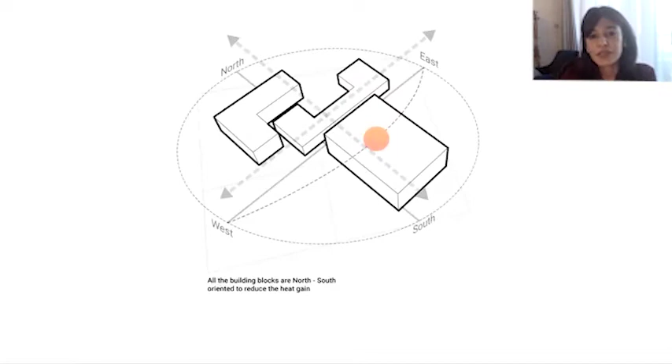So the way we approached this particular project was when we looked at all of the production facilities in the neighboring area, they're basically just sheds with poor insulation, poor daylight penetration, and we wanted this structure to be a revolutionary experience in terms of how a production facility could be designed, in terms of orientation of the blocks, housing manufacturing, offices, and packaging, creating mutually shaded blocks, spill out spaces for outdoor experiences, and creating ample greenery to reduce the heat island effect.

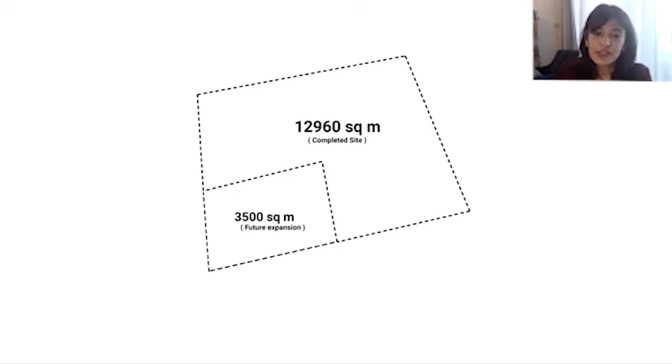So the orientation of the blocks has been done in close conjunction with the cardinals. So we're talking about maximizing the openings and optimizing the window to wall ratio along the north and the south faces for all of the offices and production areas and storage areas which require ample natural light, and along the east and west faces, minimizing the openings, but also providing deeply shaded corridors or shaded windows and openings wherever needed, providing perforated screens using bricks that were available and manufactured locally, therefore reducing the embodied energy of the materials that are being used in the construction as well, incorporating solar panels and natural north light into the triple height and double height production spaces as well.

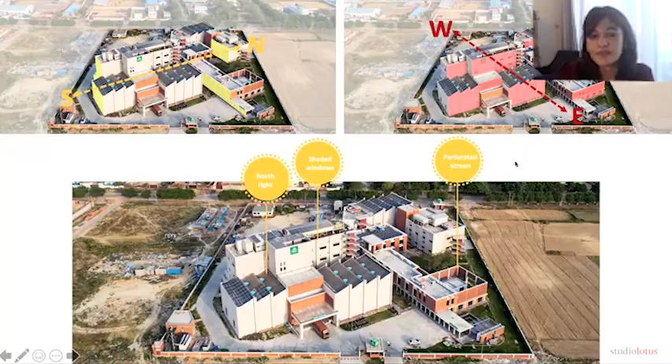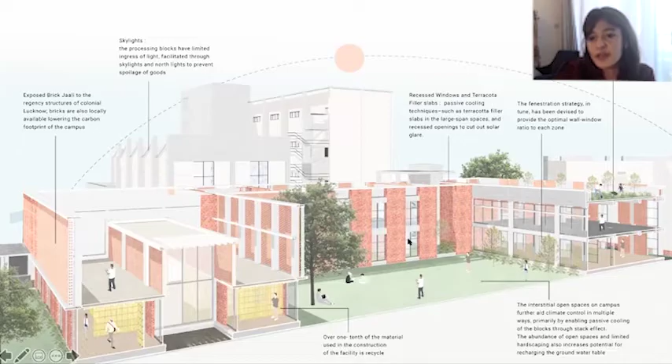So this is a view of the experience center, which is one of the first structures that you encounter when you're visiting the facility. And this gives us an overview of the entire building and how it performs in terms of the exposed jaalis, the skylights, recessed windows. We really minimized the need for air conditioning and artificial cooling in this particular project by maximizing wherever possible naturally ventilated spaces, courtyards, and reducing the microclimate by introducing terrace farming. And these are views of some of the naturally ventilated and open spaces.

And this particular project also used filler slabs wherever possible so that we could reduce the amount of concrete that is being used. So we achieved an energy cost saving of 32% by using double glazed units, PUF panels for insulation. 13% of the annual energy cost is offset by solar panels,

while the client was keen to really move this up to 100%. The challenge here was that, being a production facility, there was a lot of process energy. The process energy was quite high, which is why we didn't have enough area within our property to install the number of solar panels needed for us to be completely off-grid. So this is something that they're still exploring in terms of having a solar farm close to the site, which could then supply electricity to the property.

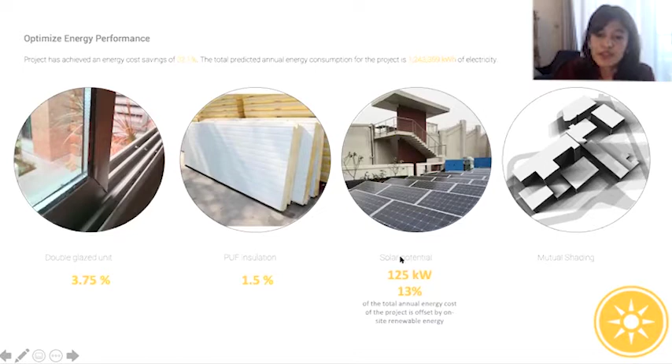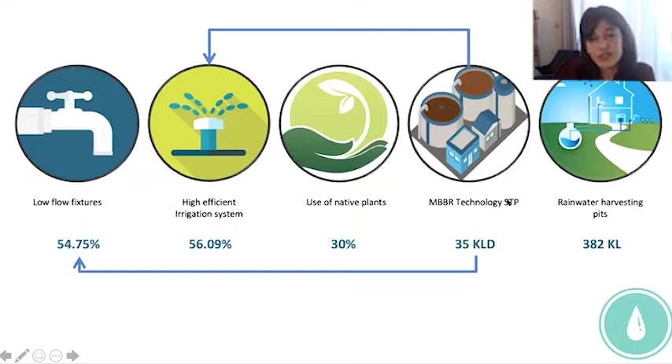Playing with the orientation, massing, and the heights of the blocks to achieve mutual shading. Using low flow fixtures, high efficient irrigation systems, native plantation strategy, utilizing the STP water into the irrigation and into the flushing tanks, rainwater harvesting pits to recharge the local groundwater as well. And these were other areas through which we were able to achieve the LEED Platinum rating.

And I'll briefly touch upon another one of our projects, which is the headquarters for Royal Enfield in Chennai. So here was a project, again, where there was a lot of synergy between what the client had envisioned for this project, keeping in mind the brand value of painstakingly crafted bikes and precision engineering. How can that translate to their headquarters, to their R&D facilities, to their office spaces as well?

The profile of the site enabled us to ensure that maximum openings are along the north and the south face, and the shorter faces were the east and west sides. We have the arrival block, the admin block, the cafeteria, the industrial design, and the production design spaces.

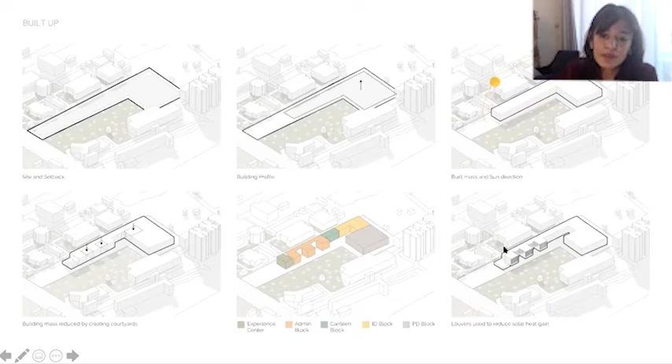So looking at the admin block in isolation, knowing that these are basically office spaces, how can we maximize daylight penetration so that we reduce the dependence on artificial light, by introducing courtyards so that there can be windows on the east and west faces as well, but these are shaded courtyards. So again, minimizing glare and solar heat gain using a combination of various shading features, which I'll talk about here.

So looking at each facade in isolation and seeing what exactly needs to be done, and all of these shading features were very carefully calibrated in terms of their angle, their orientation, their distance. So it was not a cookie cutter approach towards facade design or towards energy optimization or cooling. Each function, each block, each facade was treated with its own individual characteristics and requirements.

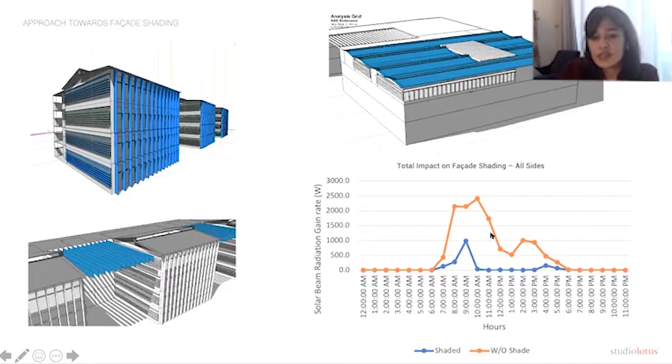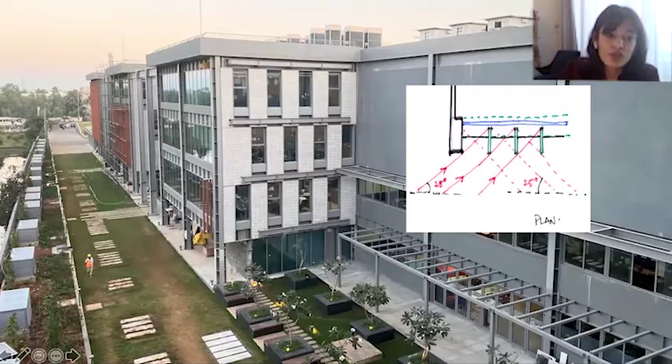And we were able to achieve a really dramatic reduction in the solar heat gain, as you can see, by incorporating facade shading on all the sides versus if we had not gone for it. So on the north side, again, like I mentioned, carefully calibrating the louvers to ensure that we minimize solar heat gain.

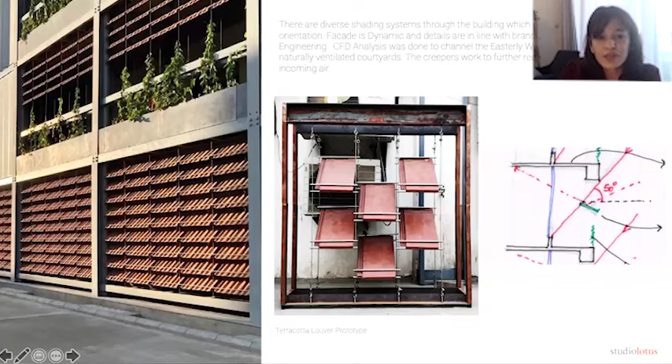On the south side, a really beautifully crafted, suspended system of terracotta tiles, which were locally sourced, and incorporating them with greenery to reduce the ambient temperature of these naturally ventilated courtyards. CFD analysis was done to channel the easterly winds from the ocean into these spaces as well. So all the breakout spaces and the courtyards become really a pleasure to be in by virtue of these systems.

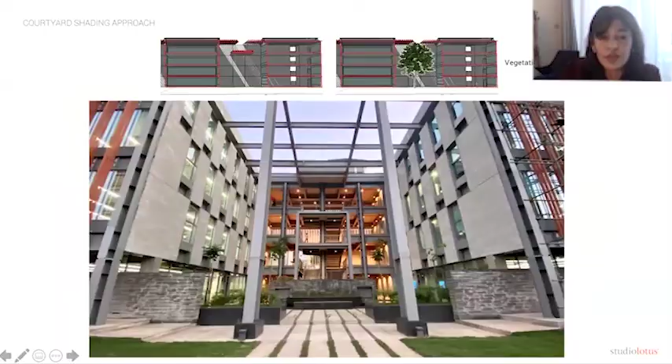Looking at the courtyards along the admin block. So again, we have naturally ventilated spaces, shading by incorporating fins or by incorporating greenery, solar panels. And we were able to achieve 80% of the floor area for 80% of working hours not requiring artificial lighting. And the reduction in the overall cooling cost as well.

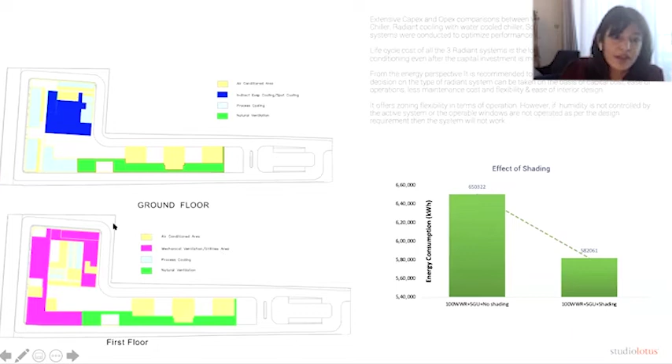And just the last point is about the air conditioning and how, like I mentioned, each space was looked at separately. So only the offices were air-conditioned spaces. Apart from that, we looked at a variety of different cooling systems, what could be the most appropriate given our particular context, which areas could do without any artificial cooling. Instead, we could have evaporative cooling using the stack effect and process cooling, and of course, naturally ventilated courtyards and spaces.

I hope that gave you an insight into how we were looking at two different typologies of projects in terms of program and scale and geographical context, and how we were able to embody some of our principles into them.

Yeah, Ms. Anusha, along with that, one of the delegates was asking a question relevant to your submission. Can you address that as well? Definitely. So, Mr. Ashish was asking, was there a facade consultant? No, I don't believe we worked with a facade consultant for this particular project.

All of the shading devices that we used were done through extensive R&D between us and EDS, along with the client, so that there could be specific responses to each facade. But otherwise, the idea, being a manufacturing kind of client and headquarters, was to keep it very simple. So the terracotta was the element where we really pushed the limits in terms of how we can apply it and use it, not just as a roof tile, but how it could be used on the vertical facade.

But if I look at the east and the west facades, they're all very straightforward. We have used exposed cement concrete blocks, exposed steel structure. So it was about really bringing it down to the bare bones, the structure, the skeleton, and seeing how we can optimize it.